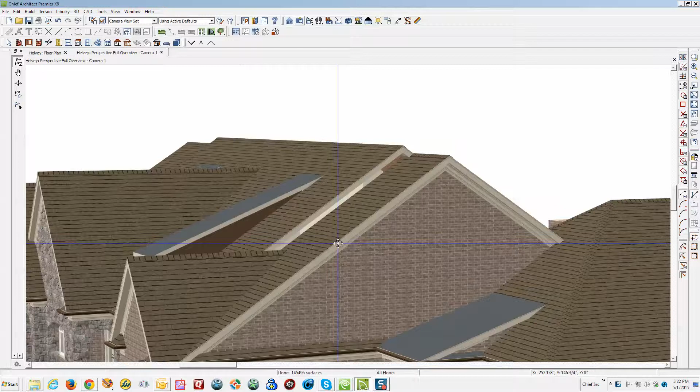Okay, I've been looking around here. The only thing I can find that's kind of screwy is this missing attic wall. That's one thing, and then also I think there's a gable here, right there with missing trim. That, I showed you in the prior video.

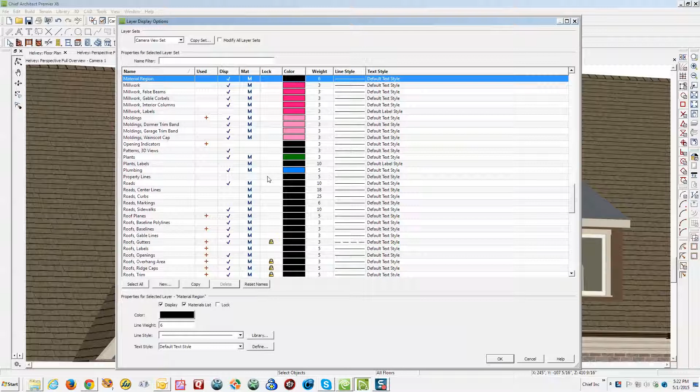I think you could make sure that the moldings are unlocked. Moldings layer... Moldings, okay, it's on and it's unlocked. Might have to do it in an elevation camera. I had to select that molding line.

I'm having a little trouble getting it. Let's do the attic walls first. It's over here. And there's apparently no attic wall there.

I'm going to go to plan, and let's see. That's the first big gable, and then must be this one here. Let me take a look at this in another camera.

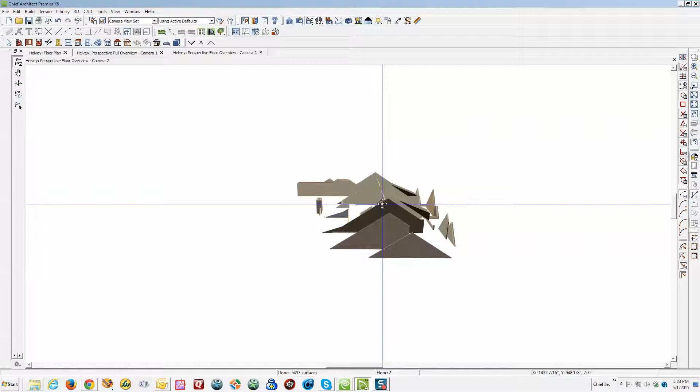Dollhouse view. I don't see it, may not be there. Okay, I think it's supposed to be right here, and it's just missing. Let's see, there's a gable there, and a dormer. There's a dormer, and there's a gable. So it ought to be right in there.

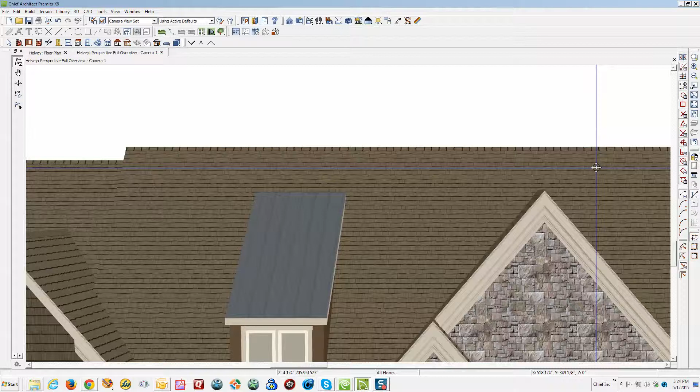And turn the grid off. There. I had a reference display on, looking for where that wall might be. Let me zoom back so I can get some sort of idea of dimension. Okay, it's about right over the apex of this gable here.

And I'm looking this way, so it must be right here. Right there, see, there's no wall there. So let's put a wall there. There's the edge of the roof plane right there, and it should be right underneath this roof plane here. And there's just nothing there. We'll just draw something there.

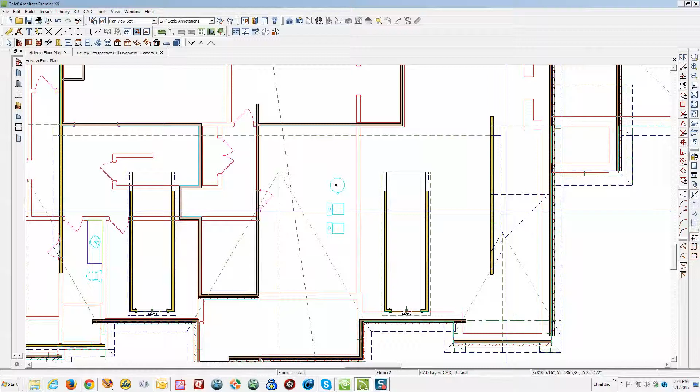And let's put an attic wall in there. I'm going to move in and just move it just outside that particular edge, and we'll go back to the camera and see if it's showing up.

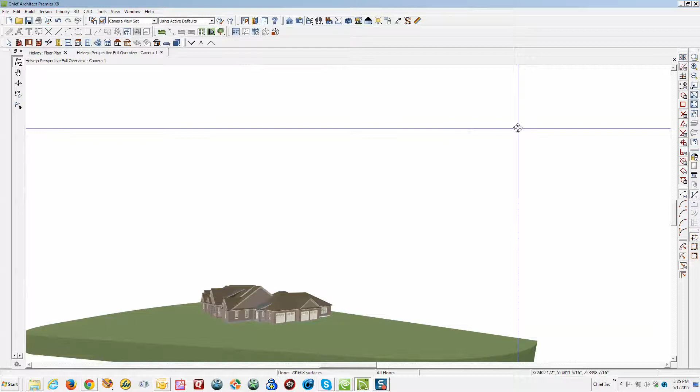It's still not showing up. I must not have it drawn in exactly right. Let's see if I can see it underneath there. I don't see it.

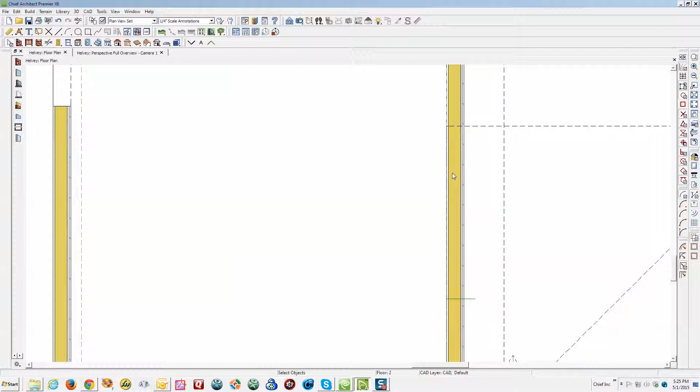So I'm just going to take this wall and move it a little bit. I just need it to show up, get it to show up some. It's not showing up at all. And the edge of this roof plane's kind of messed up.

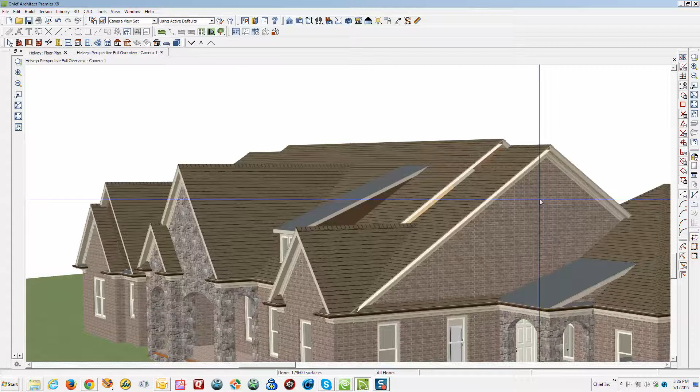Move it over here. Well, it's just stubbornly not showing up. I'll pull this roof plane back just slightly. I made the fascia look better. I'm going to move that just outboard a little bit more.

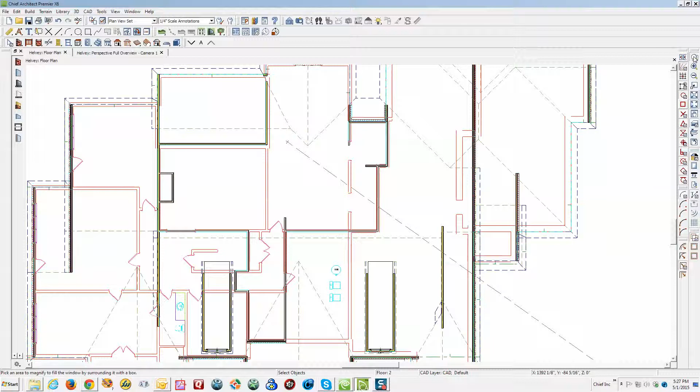Yeah, let's zoom back. There's where that ridge comes together right there. I think part of the problem is this one that's supposed to be folding under it isn't folding under it.

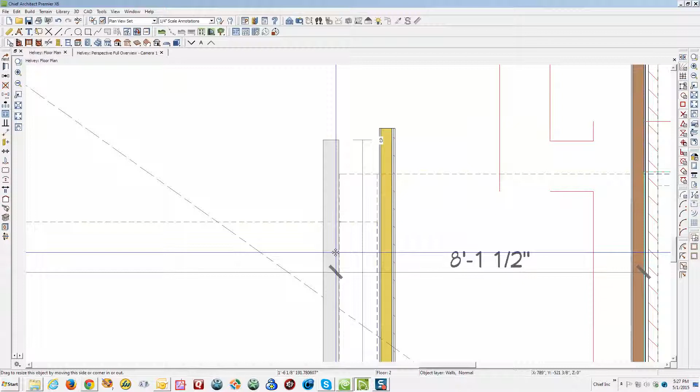I'm going to put it under there 12 inches, and then move this wall just to the other side of it. We'll see what that looks like. Okay, that's... nah, still not good.

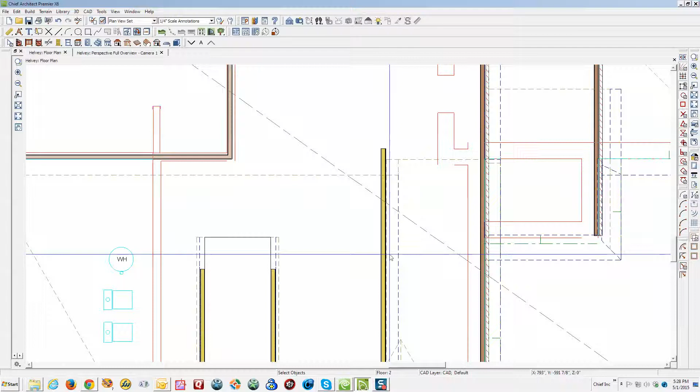I brought the fascia back by just fiddling with the edge -- the fascia that was missing. Well, that's annoying. Well, I drew that wall there. Let me program it to be an attic wall.

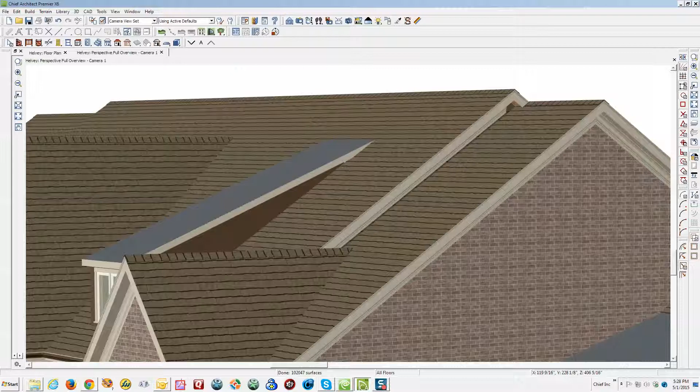Okay, it's showing up now. Yeah, there's the wall there. I'm going to adjust it a little bit.

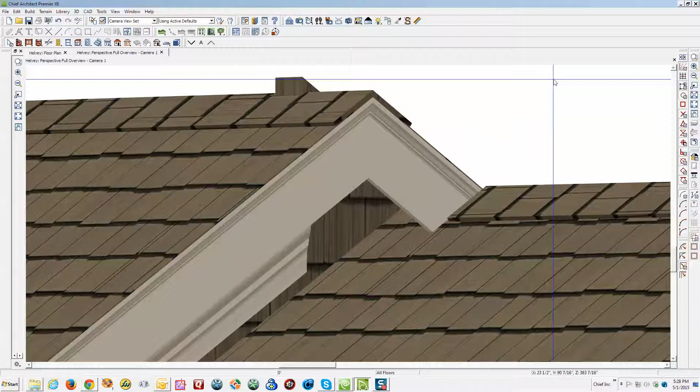See if I can get that molding. No, for some reason I'm just having no luck adjusting moldings. That looks like a wall that's sticking to... yeah, okay, don't want that up there, sticking through the roof.

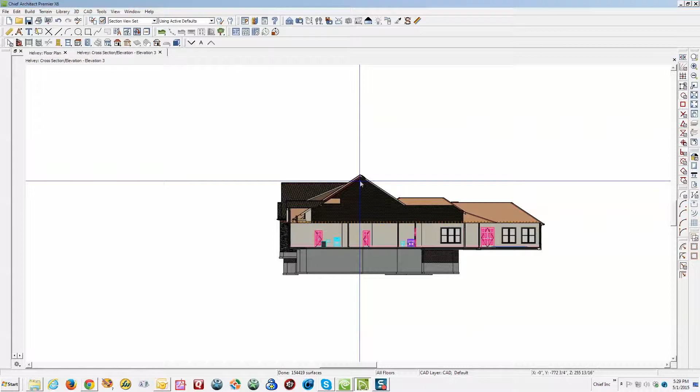Okay, I'm going to close this camera view and go to an elevation camera, see if we can't totally clean this up. Yeah, okay, see it sticking through the roof there?

So adjust that down, I finally got the wall to show up. It was a little bit harder, a lot harder than I thought it was going to be.

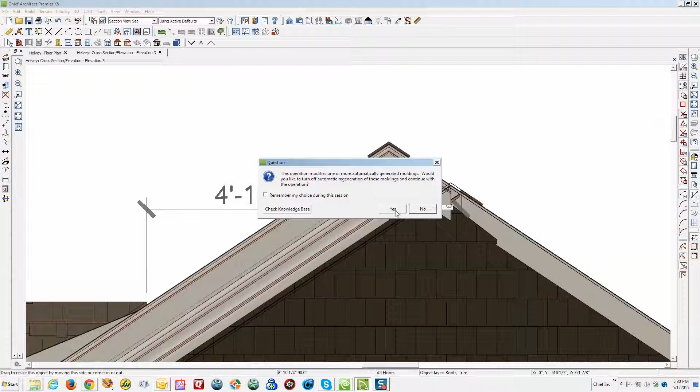Now this molding profile, see, I got it selected there. I'm going to pull this little tab out, and then grab this end and extend the molding. Okay, see what that does? I'm going to extend that back down to about there, and then tilt this edge up until it's parallel with the roof.

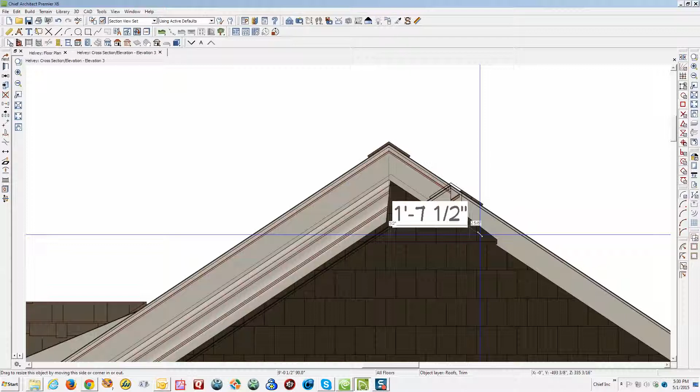Now this selected line here, I'm going to open the dialog box on it and turn the molding on -- it's turned off. Okay, well, it probably looks like we now need to extend that, but now it's extendable.

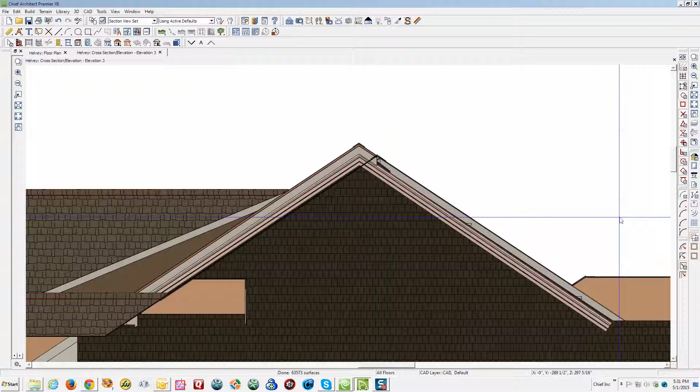These moldings like this are just kind of twitchy. They're kind of nice, but they're also kind of a hassle. I'll grab that and control-key it back up there. It was off angle a little bit.

This looks a little funny because I'm in an elevation camera view. I'm going to check it again in an overview camera. Any two-dimensional work that you do in an elevation camera, you should always check in an isometric camera.

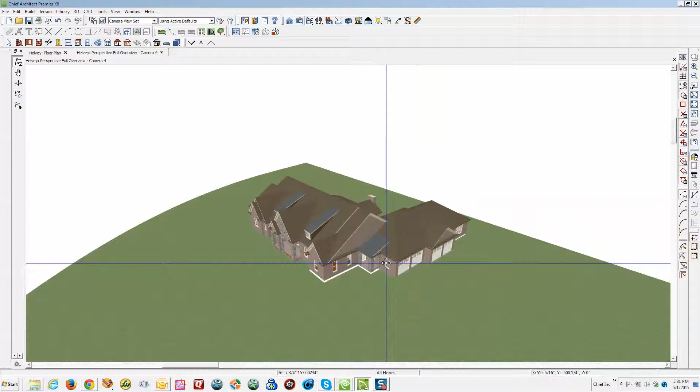Okay, I extended that molding way down in there. Didn't need to, but that's cleaned up. Now the only thing left that I see, I tried to find that spot you were talking about. Oh, there it is. Okay, we'll take a closer look at that.

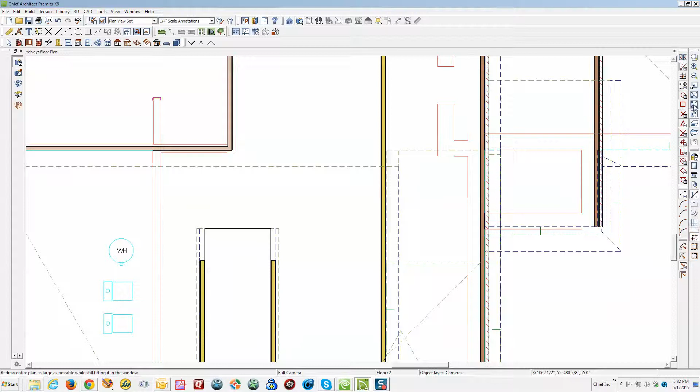I'm going to fix the molding in an elevation camera. I'll wait for that to put together. And we'll zoom in.

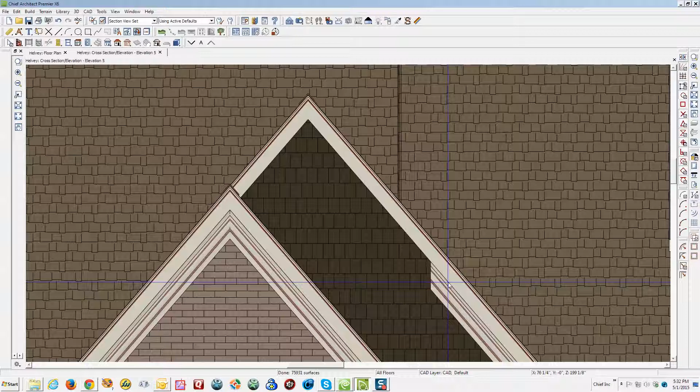I'm going to do this just like I did the other one. I'm going to click on it, select it, and zoom in to find that little 90-degree gadget. I'm going to extend that. I found that it just makes it easier. If you do it zoomed out, you're liable to grab the wrong corner, and then the molding will go all over hell and gone, and it's hard to fix.

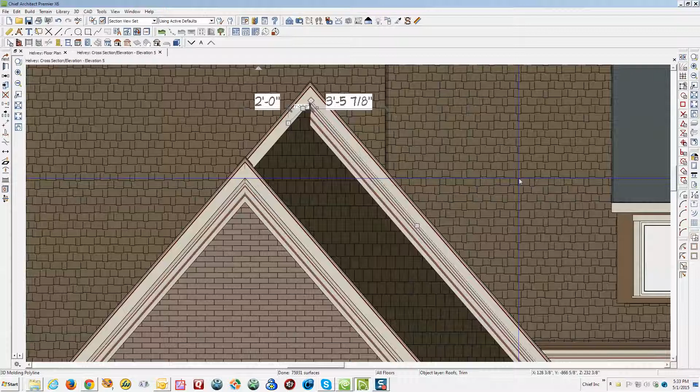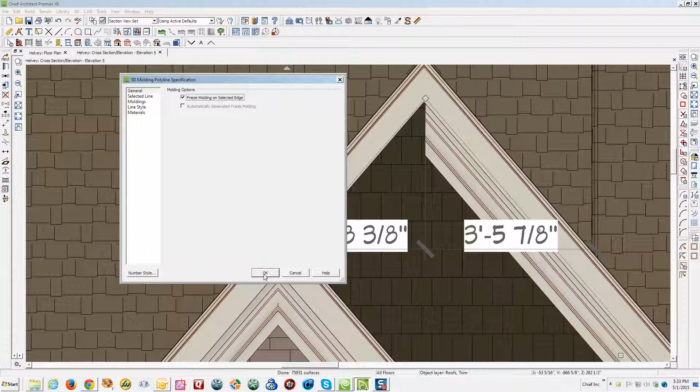Drag it up there like that. That should extend it. Yeah, that's pretty good. Just like I did on the other one, I'm going to left click on the end of this, hit the control key so I can be free of angle snaps, and line that up. There's still no molding on it, so I have to open that dialog of that line segment and turn the molding on. That looks better. I'm going to extend that just a little bit more so it disappears and there's no gap there. Okay.

Now we'll see what we can do with your other complaint. I believe if I get my nice full camera at kind of an angle, I should be able to see what you were showing in your image.

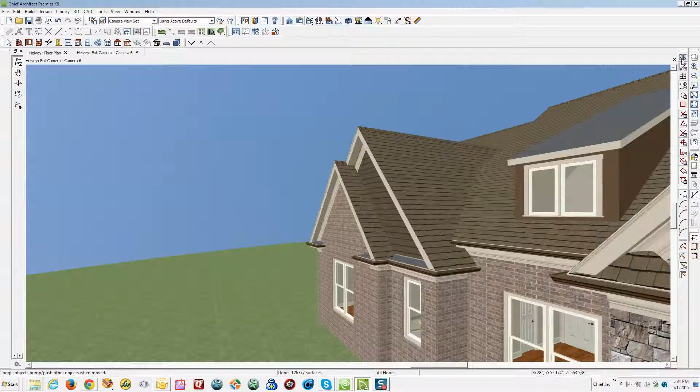There's that molding I just fixed, but it didn't completely close the gap. I'm going to click on this wall here and open its dialog box, and check the edit toolbar. Okay, it looks like it's in alignment with the wall below because there's no indication here that it's out of alignment. I said I would check that.

See, in an elevation camera, you don't see this gap. I'm going to open the roof plane dialog for that roof plane and see if there's anything funny going on with it, settings wise. Box eaves, that's fine. Default overhang, that's common as dirt. Roof layers, sheathing, soffits. I'm just looking for any settings that might be causing that gap there.

Okay. I wonder if you actually intend to have 2x8 studs. That's what it is set to. And your studs are the same height as the face. Well, okay, that should work okay. I didn't think that was causing the problem, but I thought I'd check it. There's no problem here, don't let me give you some funny ideas about that.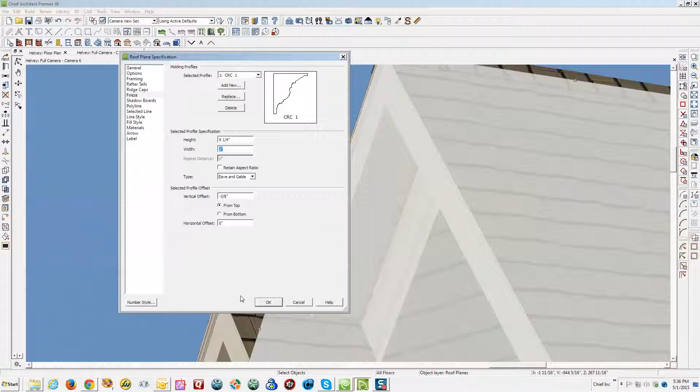Well, rather than change them all, I'm just going to click on that molding if I can. In this view, they're kind of hard to get except in an elevation camera. I'm going to hold that camera open and go back to an elevation camera. I just thought of something that might help. Might look goofy too. We'll see. Okay.

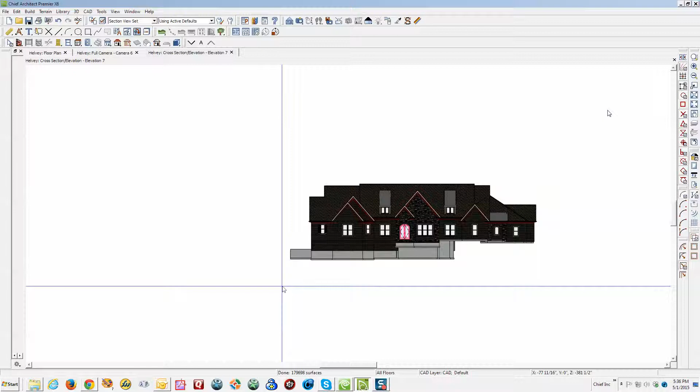I thought maybe if we took this molding here, opened the dialog - you've got to set here for 2 inches - let's set it to 3 inches and see what that does. You're not going to see any change in an elevation camera, but we'll go back to this. I closed the gap a little bit, but that's kind of a workaround.

Now this edge here, this roof, might be causing some problems. Let me just drag that over and see what it does. Wait for the things to catch up. No, that didn't do anything. I'm going to do it one more time, which may be a little bit too much.

I don't think that's helping. I'm going to drag it over one more time. If I drag it over too far, it'll chop into the wall and cause all kinds of trouble. But I wanted to see if I could close that gap by doing that.

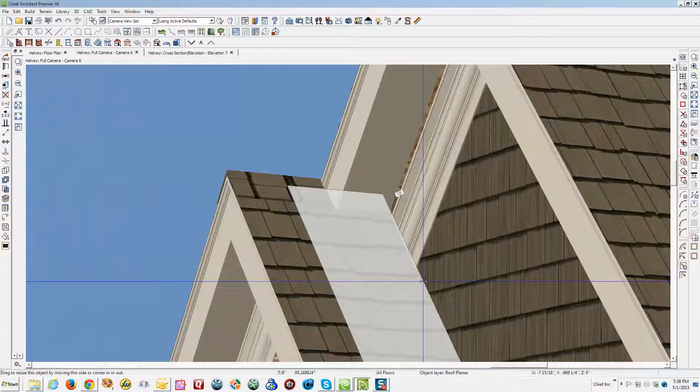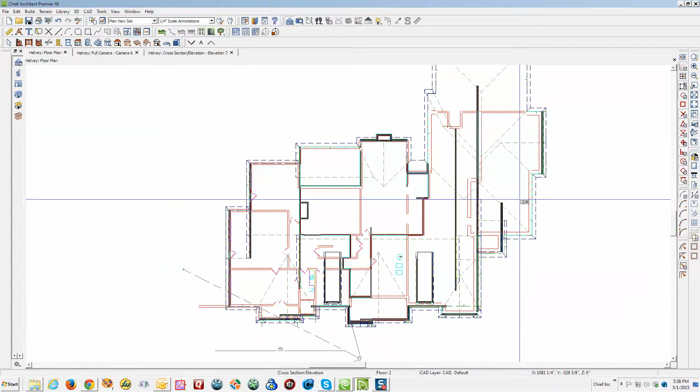It's not doing that. I closed it, put it even closer. I think I'll go back to the elevation camera and set this. Probably don't think of that as much of a fix. Let's set it so I'm just going to cover up that gap with the molding on this one area. Okay, that worked, and I don't think anybody would notice that too much. You'd have to really look. This is set to 2 inches and this is set to 4 inches.

Now, from your image, I'd say I've solved your problem. In terms of this junk here not lining up, if you want that to line up, that's kind of difficult because this is the same material, I think. Let's see. Sable brown. What's this? Sable brown. Yeah, so just like what Dennis was saying, it's the same material.

What you could do, now it's lining up pretty good considering the geometry. You're not going to get a perfect match, but you can take this wall here and, see, it's got this material on it on the outside. You could go to plan material.

Let's see, what was the name of that? Just brown something or other. I don't see it. It must have some other name first. Okay, it's brown, sable brown. That's what I'm looking for. It's not under the B's. It would have been at the S's.

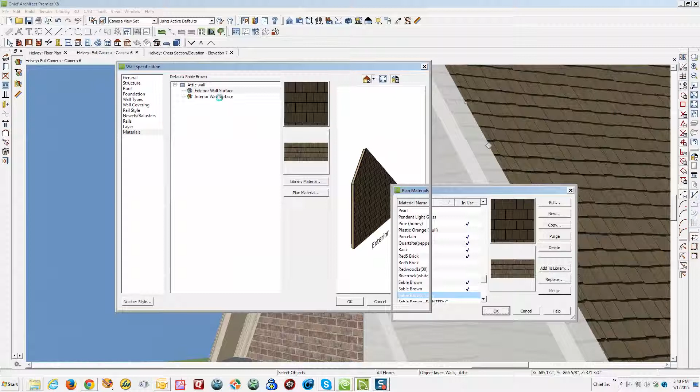Let the computer catch up with itself. Okay, now we've got sable brown copy in there. Now that I have 2 materials with the same appearance but different names, I can adjust one and the other will stay put. But like I say, it lines up here, but it doesn't line up here. I don't think it's going to be very easy.

So you'd use this material adjustment tool to adjust the copy, and then you could change the texture here, the scale. In this case, I think you want to change the Y scale. Let's see, Y scale. Oh yeah, change that to a taller figure. Click OK. Here you can stretch this new material around, and it'll stretch and change relative to the other material.

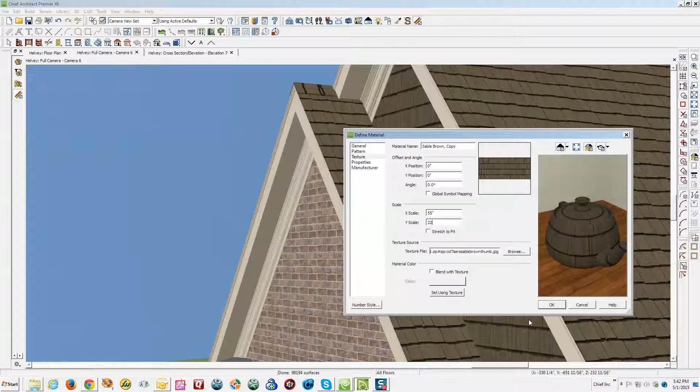Okay, that changed the orientation a little bit. And also, once you get the relationship about right, then you can change the offset. I'm going to lower it 6 inches. Whoops, it's not a minus sign. In other words, you can change one material relative to another by moving it up and down with these X and Y position input boxes.

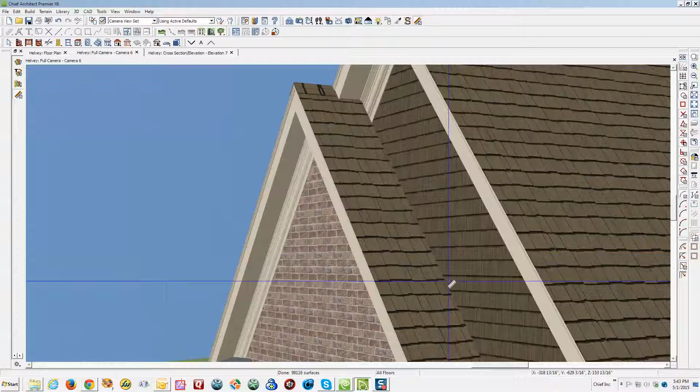Okay, I think we need to move that. I'll click on it again. Move it down a couple more inches and see what that does. You just have to be patient to do this sort of thing. You can do it if it really needs doing. Chief Architect is flexible enough that it gives you the tools to do that.

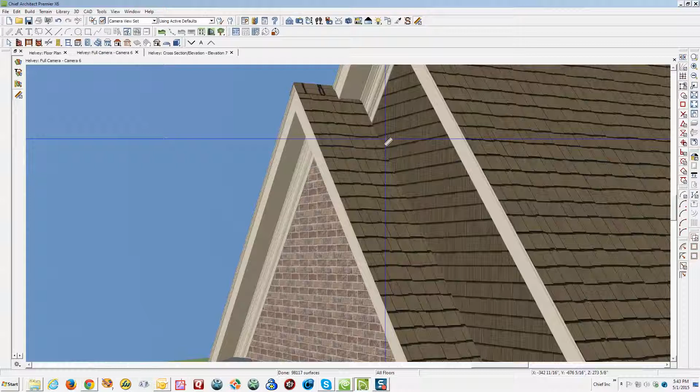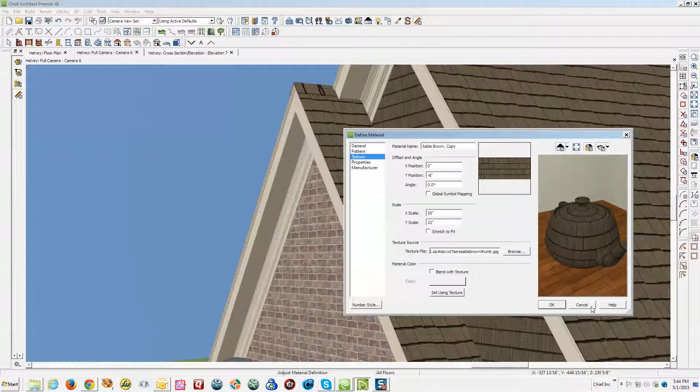Okay, that lines up pretty well. It's not perfect. I wasn't going for perfect, but it is closer. You see that? And I did that by creating a copy and then adjusting the copy. You can change the scale of the texture, and then you can also change the offset of the texture. It gives you quite a bit of control over a custom material.

So I think that's about it. I hope this helps you out. And I think you've done a really good job on the house. Well done. This is just part of learning the software—all the little funny nuances that you have to go through to get a product. Thank you.